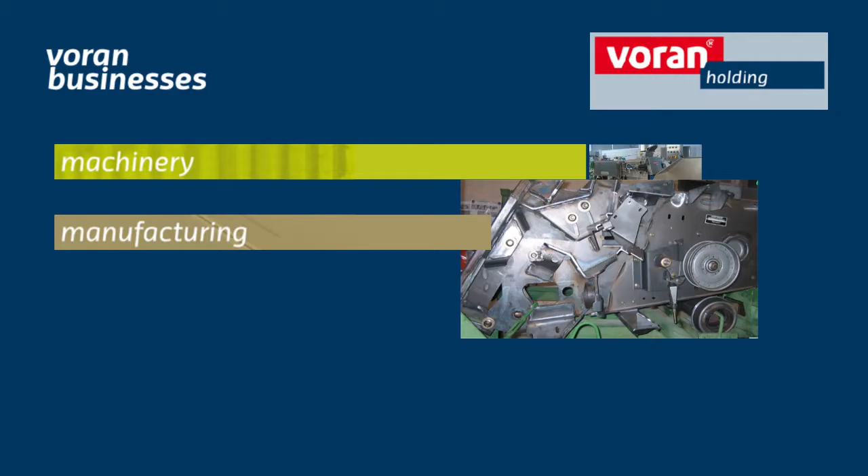For more than 8 decades, Voran has stood for quality, innovation, and a dynamic outlook. Always at the cutting edge, we continue to develop proven systems as well as pioneer new ways for sustainable, cost-effective, all-in-one solutions to leading industrial standards worldwide. Voran, the name you can rely on. We are the market leader in our business sectors: machinery, manufacturing, plant construction, and facades.

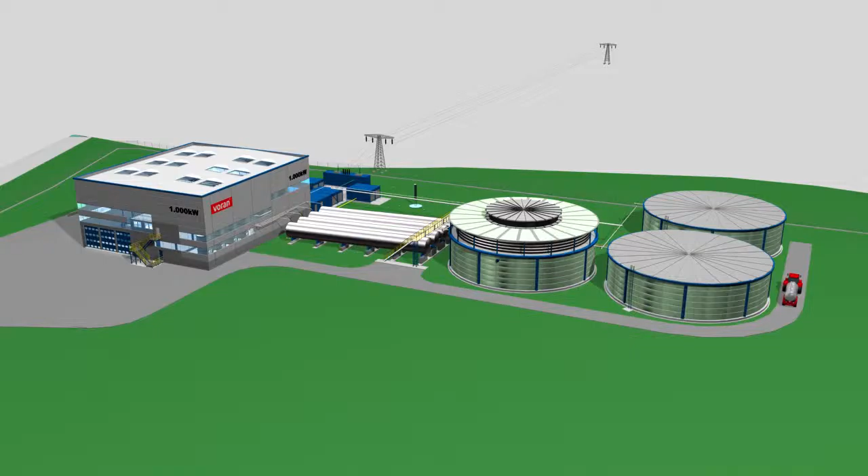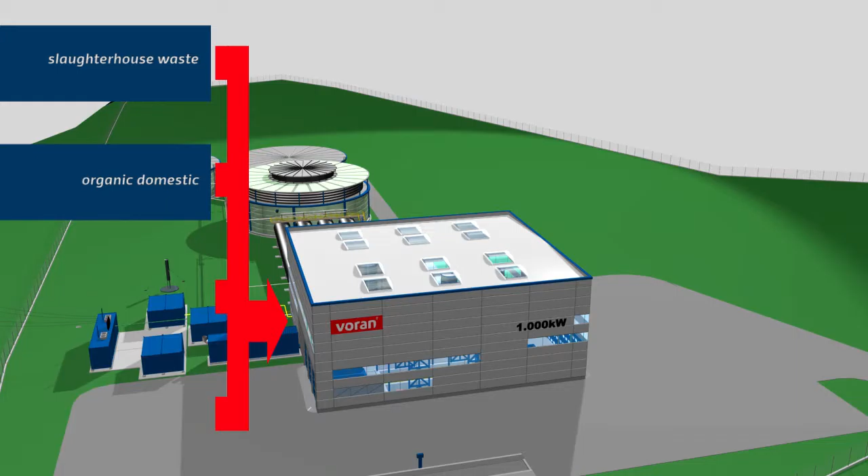The following animation demonstrates how this environmentally neutral process works. The raw materials, also called substrate, used in biogas plants are usually Category 3 slaughterhouse waste from pigs, beef cattle, sheep; organic domestic municipal waste from disposal companies, trade, industry, supermarkets, unpackaged or still in packaging; waste from agricultural plant production, liquid manure, solid manure; and process waste and organic residues from the agricultural and food industries.

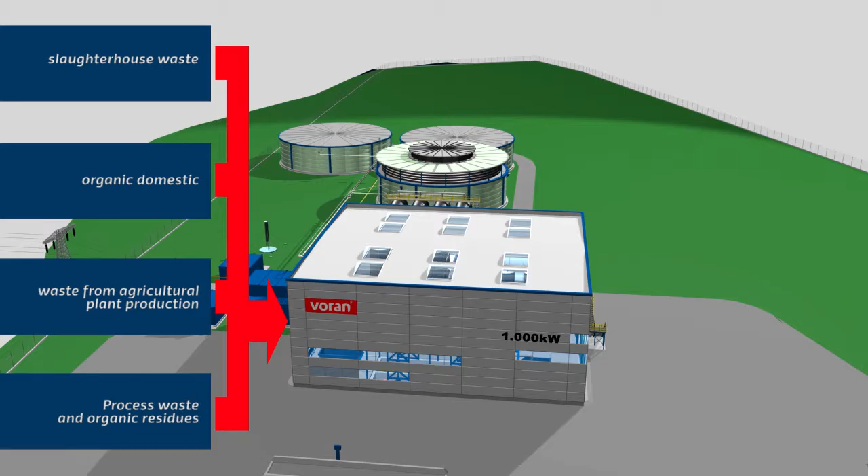The electricity and heat generated are baseload capable, meaning they are available around the clock independently of weather conditions. Organic residues are not only disposed of in line with regulations, but are also processed profitably as part of a sustainable cycle in the form of biogas, which is then purified and compressed for further use, along with heat dissipated from the cooling water and exhaust gases from the gasifier power station.

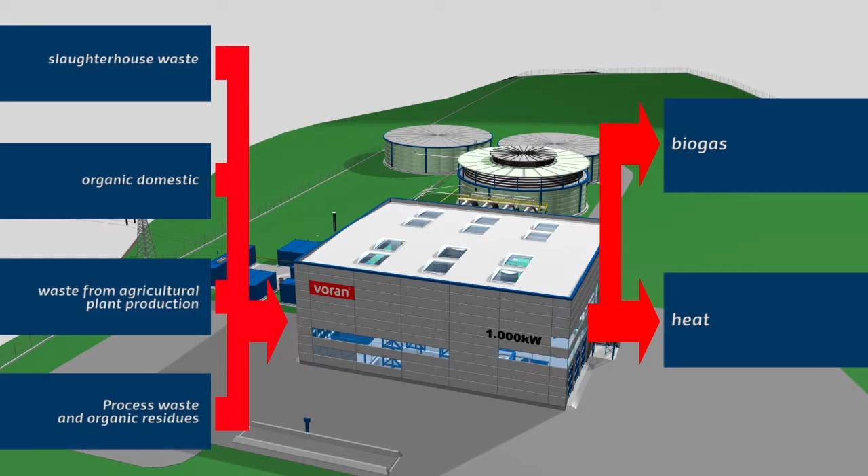To the same extent that you use organic waste in this CO2 neutral process, you avoid the consumption of fossil fuels.

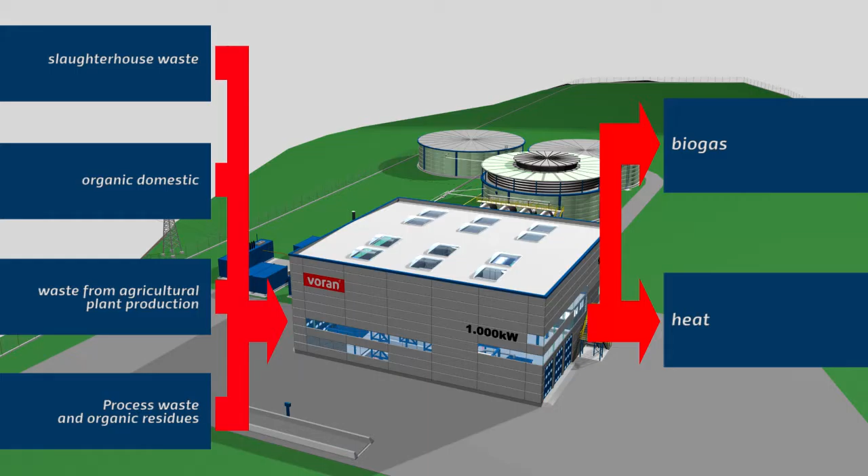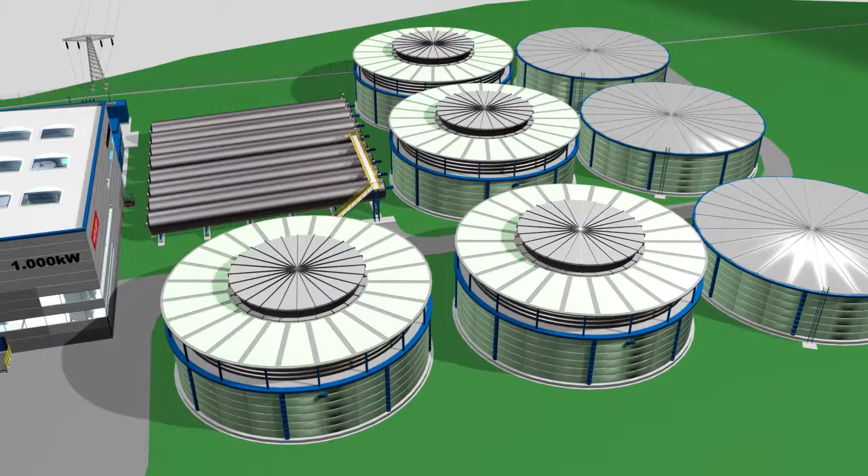Voran biogas plants can be implemented quickly thanks to their flexible configuration and, depending on demand, can be expanded at a later date. Specific customer requirements, the latest scientific knowledge put together with ongoing practical experience with references in process technology, instrumentation technology, and the management of power plants are the basis for our modular supply capability of 10,000 to 150,000 tonnes of organic matter per year.

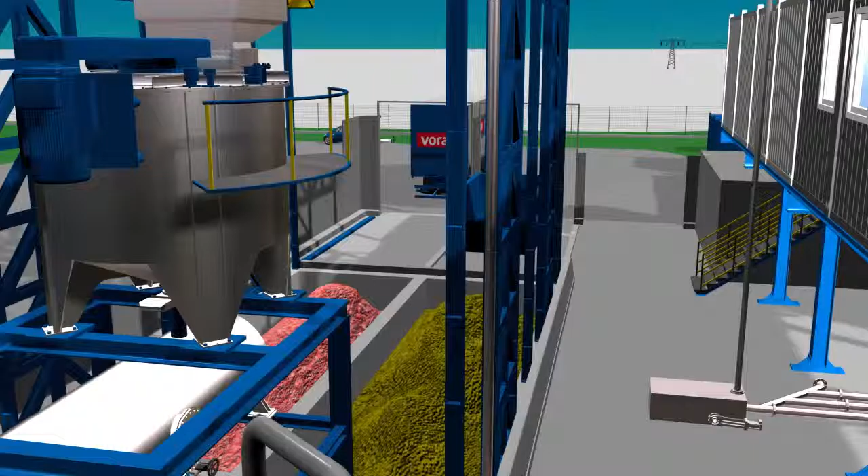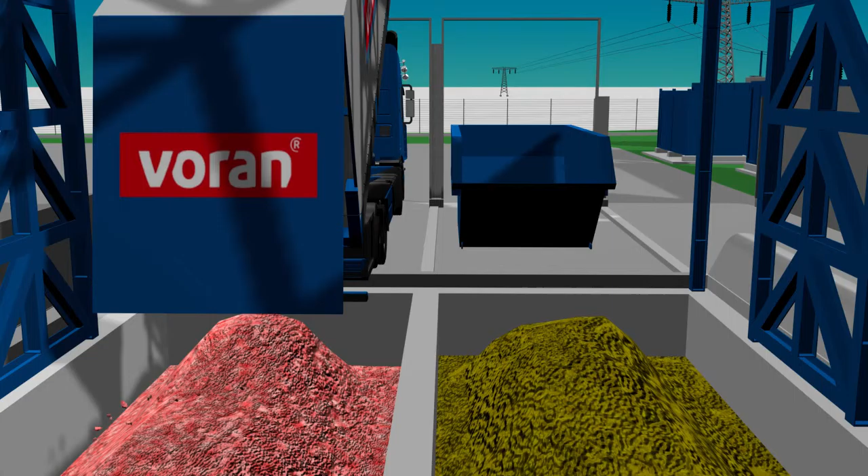Customers supply material via a weighbridge, where the weight of the vehicle plus load is recorded. Bulk organic waste is tipped directly into the intake hopper within the odour lock inside the delivery building. Containers are delivered to the unloading station from where the organic waste is fed into the intake hopper. Tankers with liquid organic suspensions dock at standardised connections to pump the liquid directly into the relevant holding vessels.

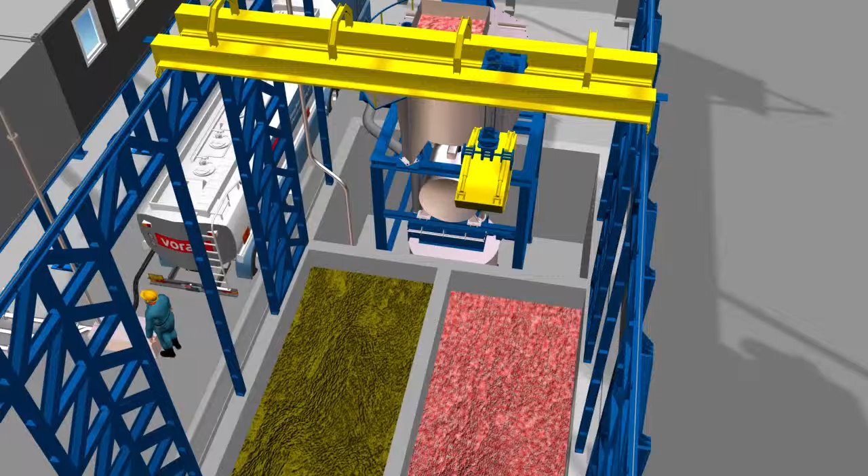The principle for optimizing fermentation is liquidization, mixing and removal of contaminants. A crane lifts the substrate into the preparation tower, where it then passes through these processes. The shredder pulverizes organic waste into particles smaller than 25 mm in order to obtain a structured substrate. In the pulper, the substrate is reduced into a suspension and mixed homogeneously.

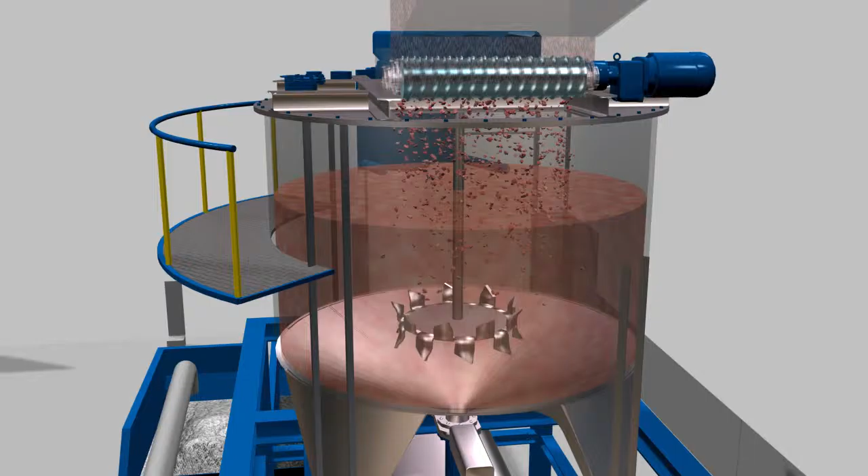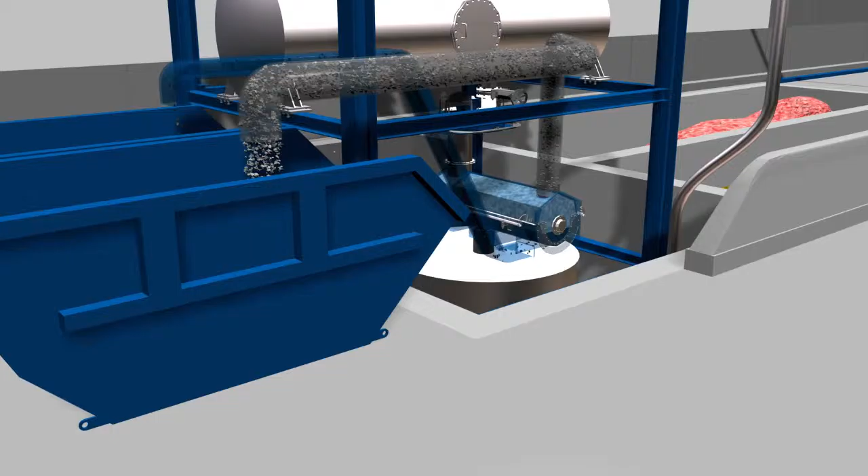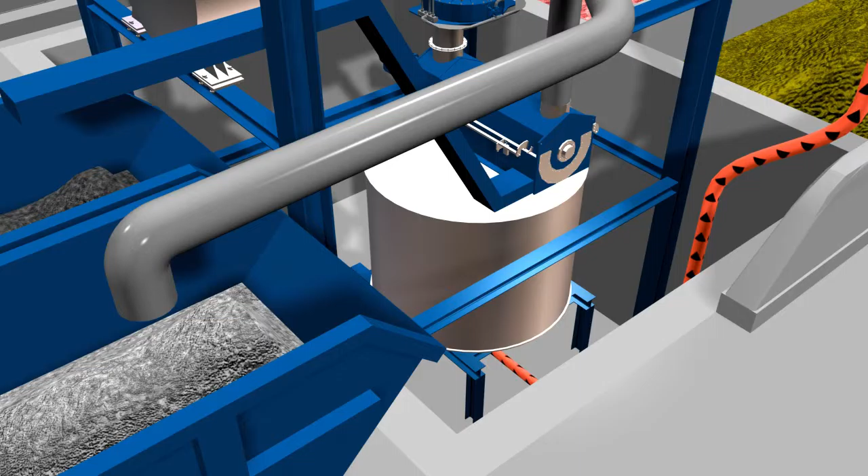Contaminants are removed in the separator, collected in containers, and then properly processed or disposed of by service providers. The substrate, now liquefied, mixed and free of contaminants, is collected in the pump-off tank and fed into the appropriate holding vessel.

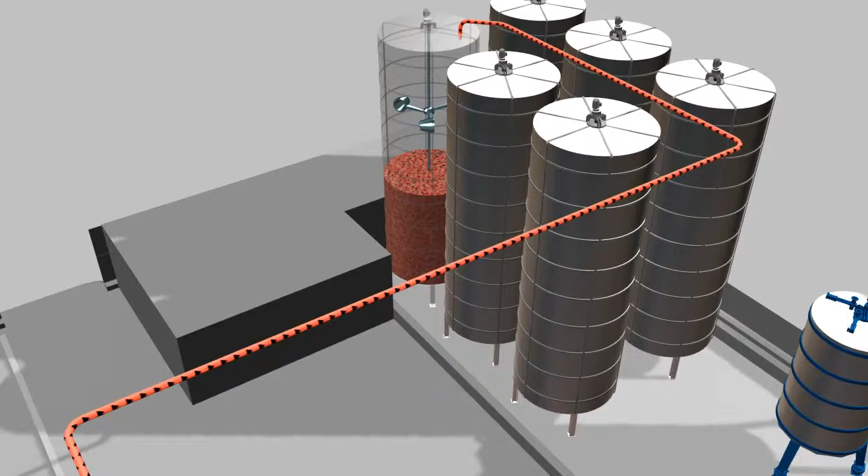A technical innovation of Vorar plant technology is that the substrate produced in the preparation tower is graded according to specific criteria and then stored in separate holding vessels. Liquid suspension, ready for use, brought in by road tankers, is fed directly to the appropriate holding vessel.

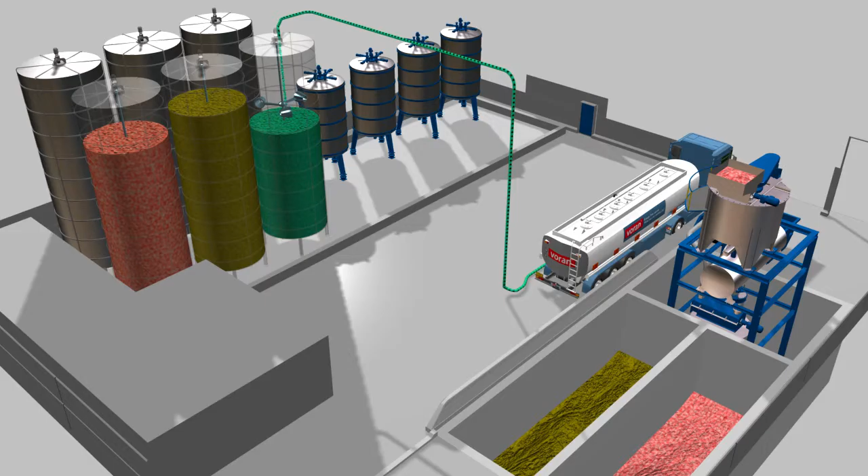The admixing sequence during feeding is a precision process monitored by load cells on which the admixing vessels are standing. This ensures consistent substrate mixing quality and high biogas yield. Sealed airtight and continuously heated and stirred, the desired biogas product is made available within a few hours or days.

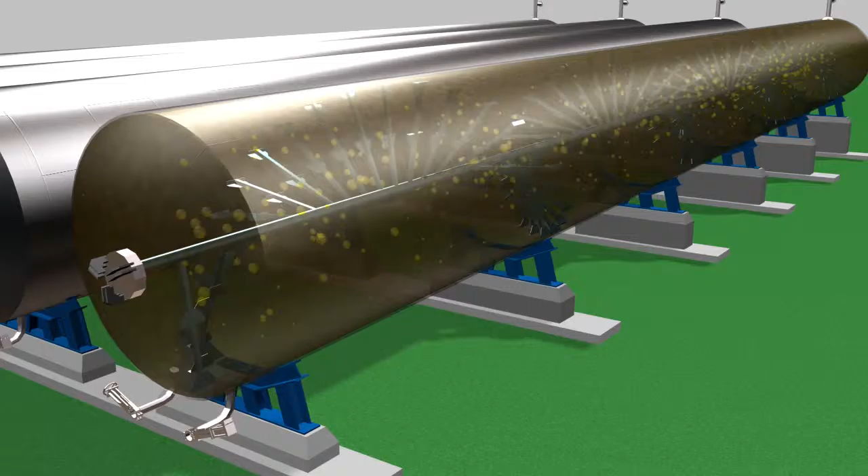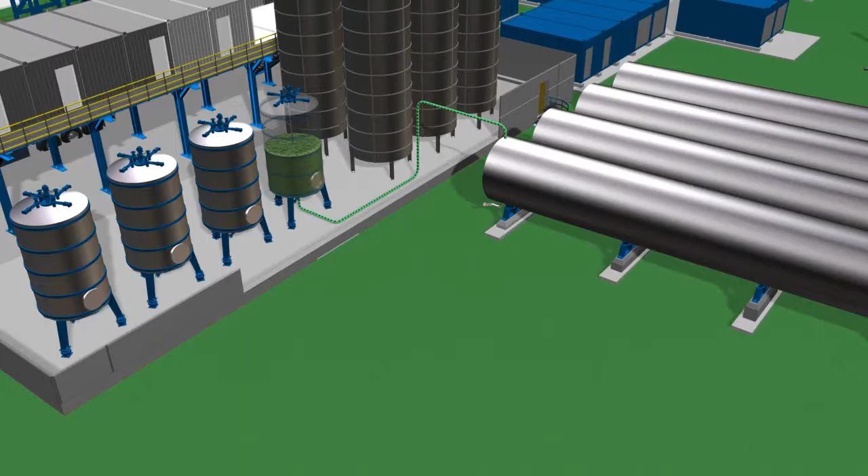The actual fermentation process takes place in the main fermenters and post-fermenters. Various types of bacteria, microorganisms and enzymes break down the substrate until the methane fermentation process releases the required biogas product. Each admixing vessel containing a successfully optimized substrate charge is assigned a tube fermenter, meaning that several biogas plants can be operated in parallel.

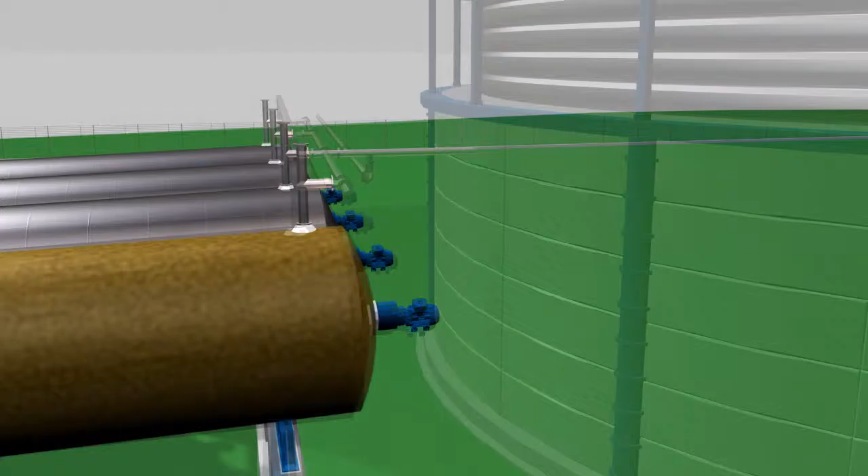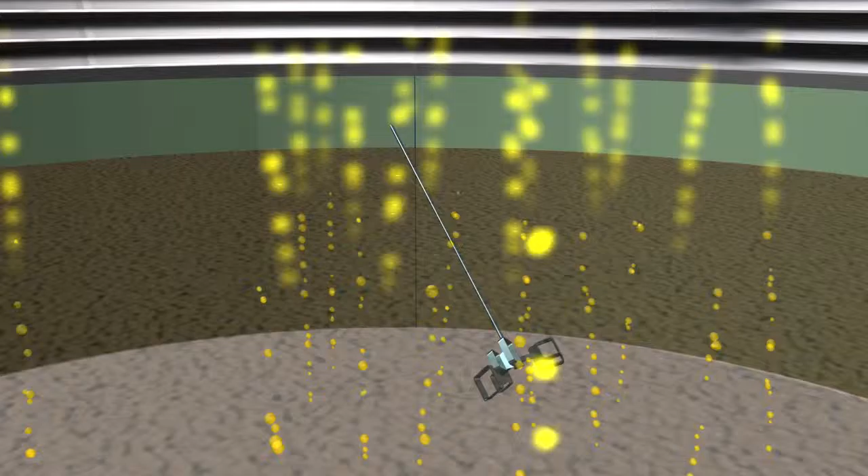From the main fermenter, the substrate is fed along a holding path into the post-fermenter, where the biogas is stored in the flexo tank and can be drawn off pressure-free.

After fermentation, the spent and sanitized substrate is then fed into substrate storage, where it is kept until it can be processed in the fertilizer module or used as manure. The storage capacity can be selected to comply with legal regulations.

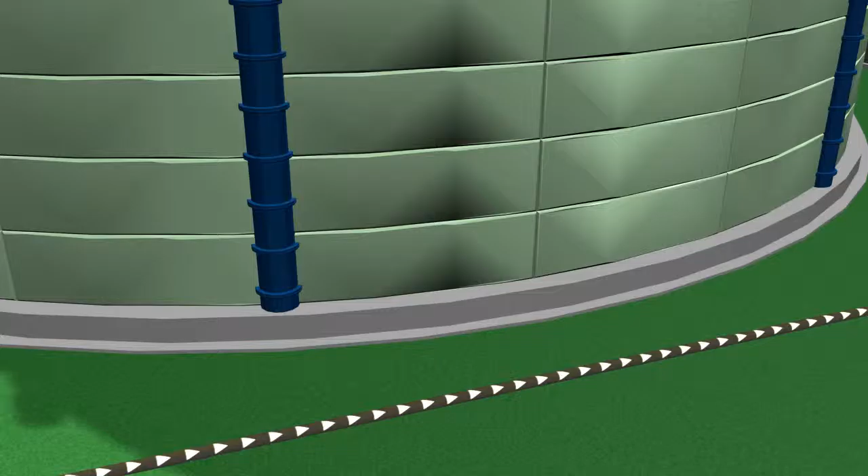Before the spent substrate can be fed to final storage, it must be sanitized at a temperature of at least 70 degrees C for at least 1 hour, as dictated by legal legislation.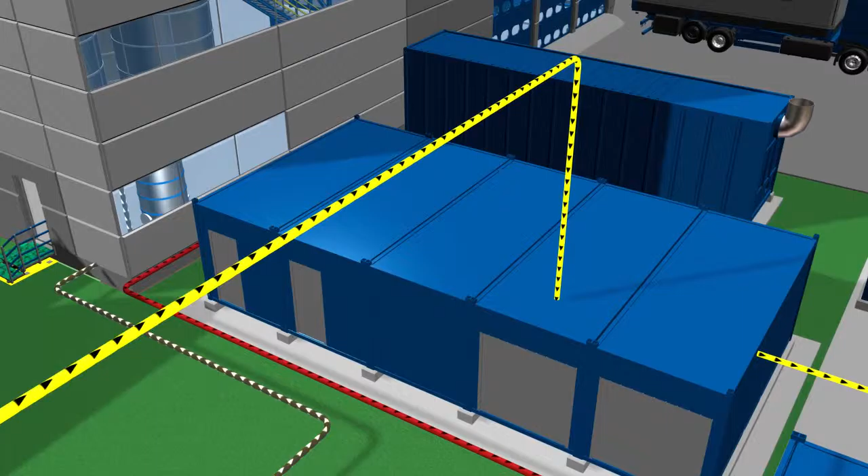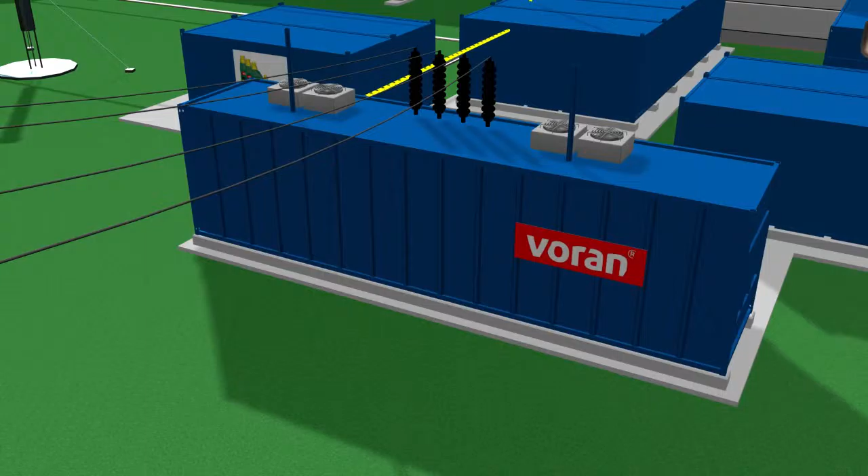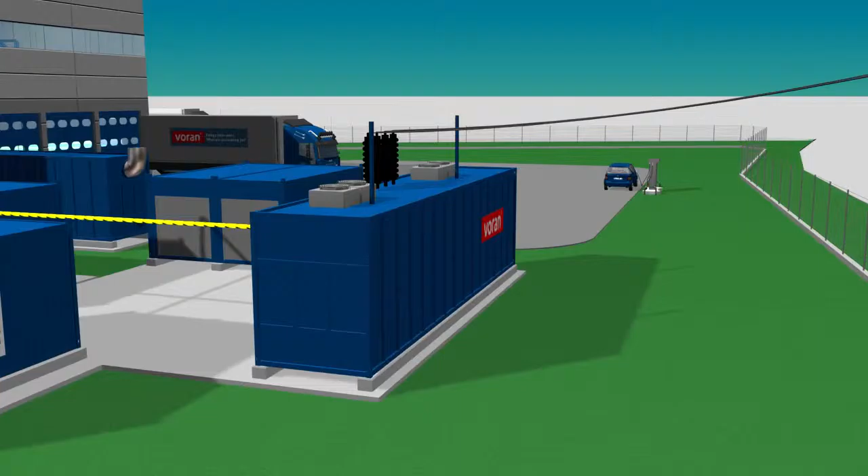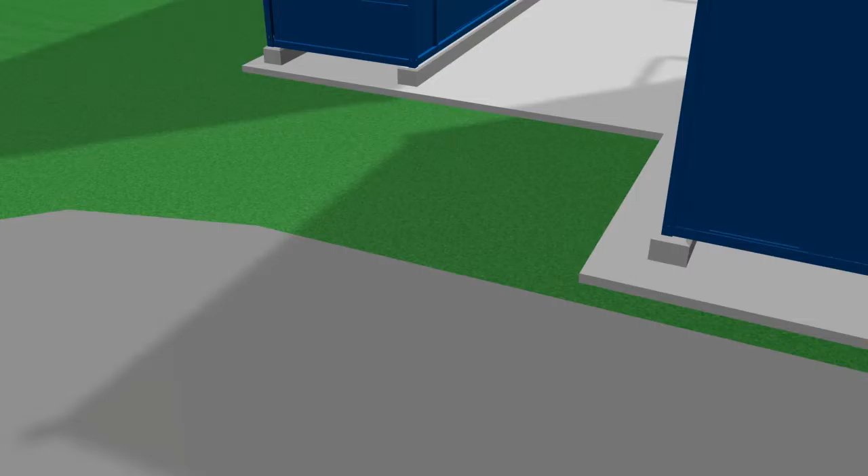Biogas can be fed into the gas supply mains so that it can be sold or piped to another location to be consumed or sold. It can also be used to fill gas cylinders or used as fuel for vehicles.

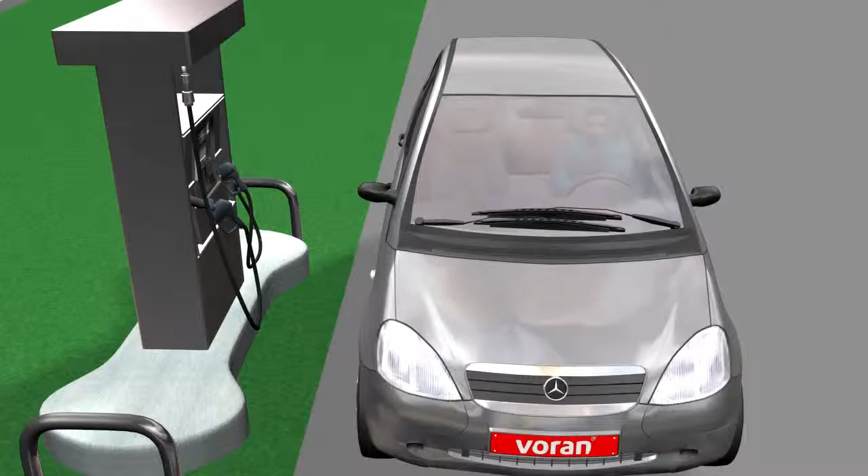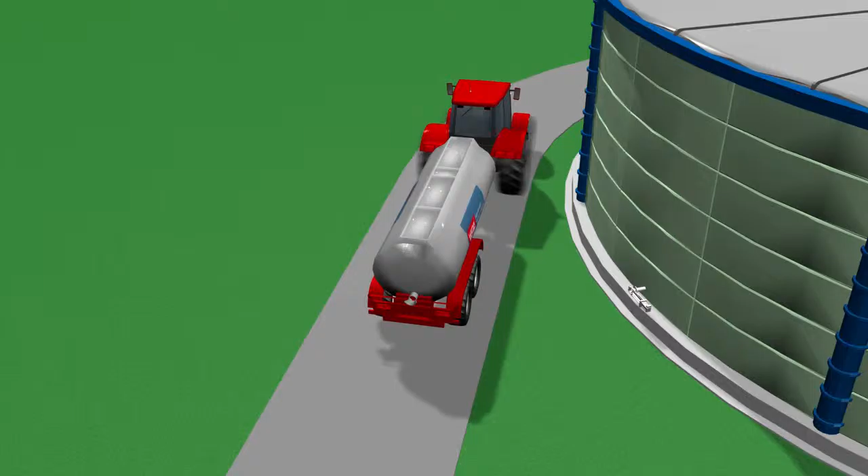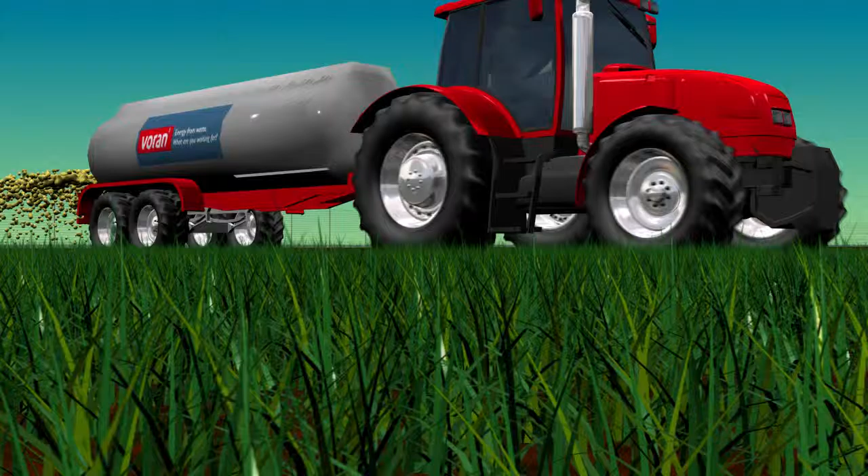In addition to electricity and heat, Voran biogas plants also produce high-quality, odour-neutral fertiliser. The nutrients in the substrate remain intact and are ideal for use on plants. The fertiliser can be used on authorised agricultural areas within the scope specified by legal legislation.

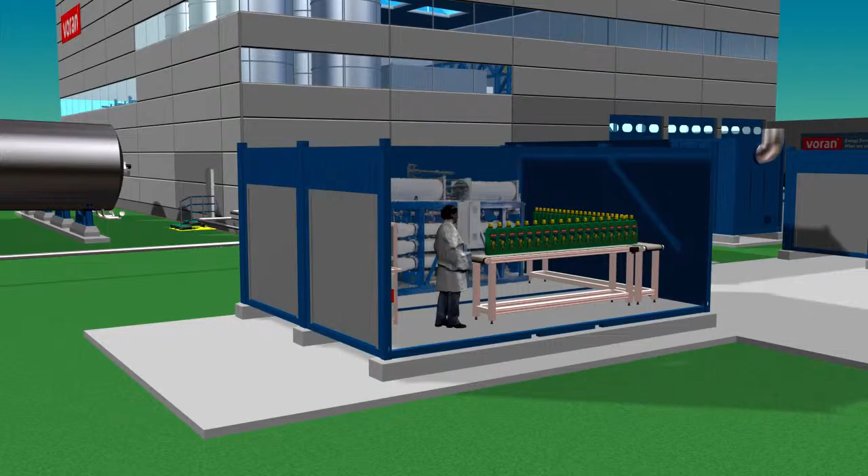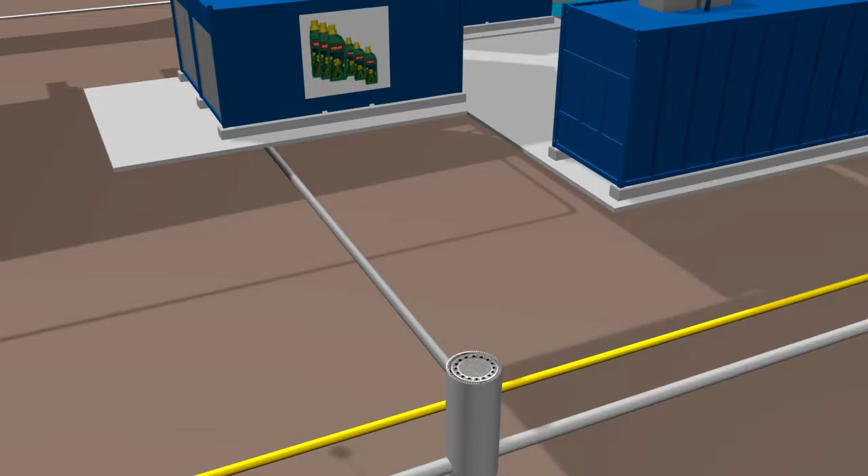As an option, Voran offers a fertiliser module for thickening the spent fermented substrate so that it can be used together with a filling unit to fill consumer packaging units in 1, 2 and 5 litres. This approved organic fertiliser complies with the strict directives of the laws applying to fertilisers.

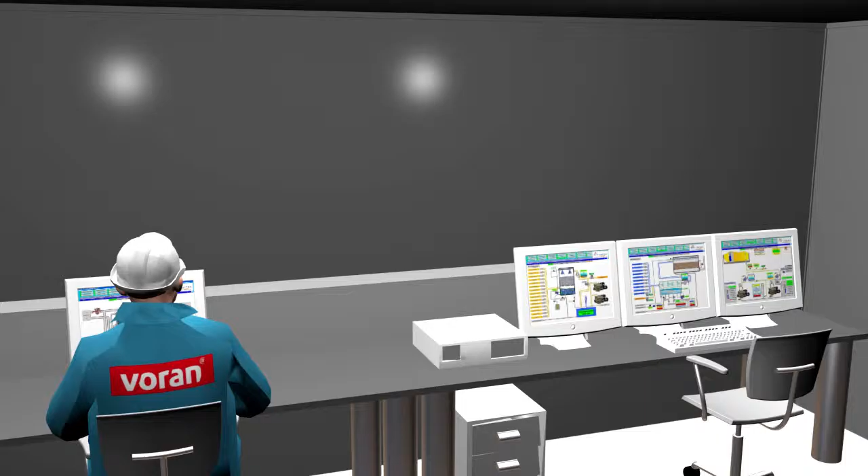Process water is largely recycled within the plant. Any drain water can be fed into the municipal sewer or into water channels with sufficient freshwater flow. The very latest measurement and instrumentation technology is implemented to optimise processing, yield and availability.

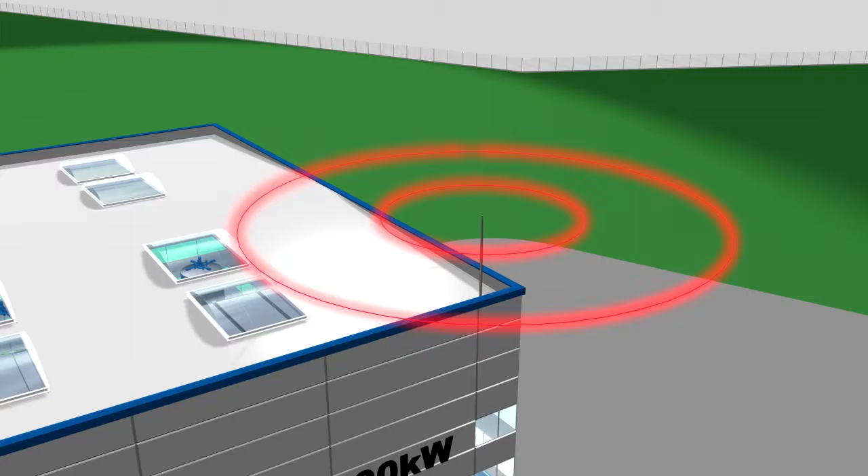Using a computer modem, it is possible for authorised specialists from the plant operator and manufacturer to monitor and control the plant from a remote location.